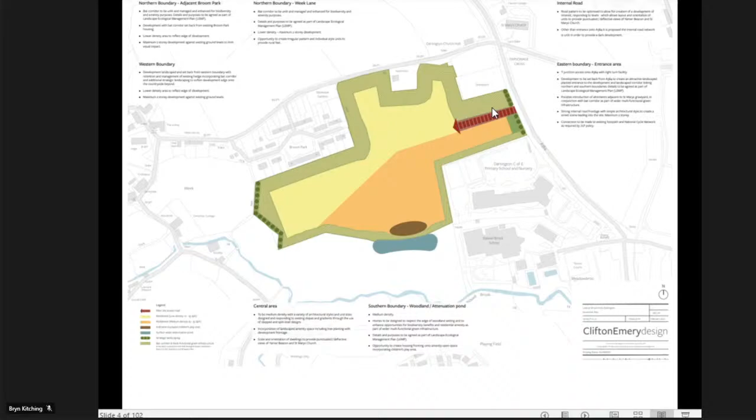Access was approved at the outline stage, so a new vehicle access into the site from the main road, at the halfway point between the cemetery here and the school here. That access point, involving a right turn lane and cycle pedestrian access, was approved as part of the outline.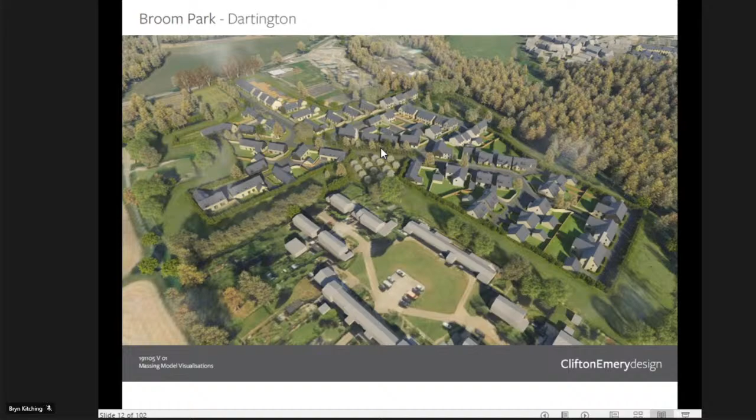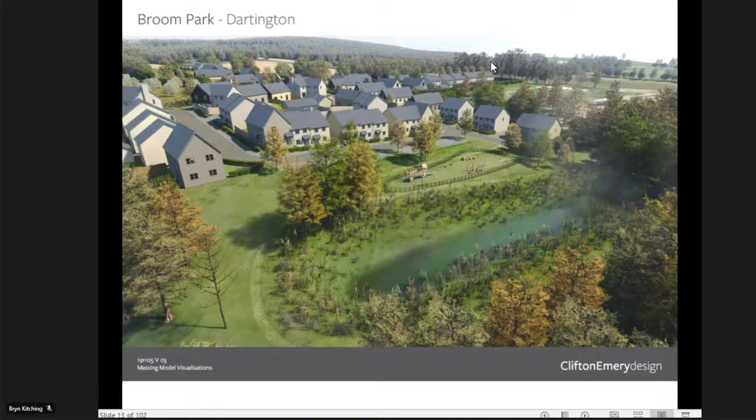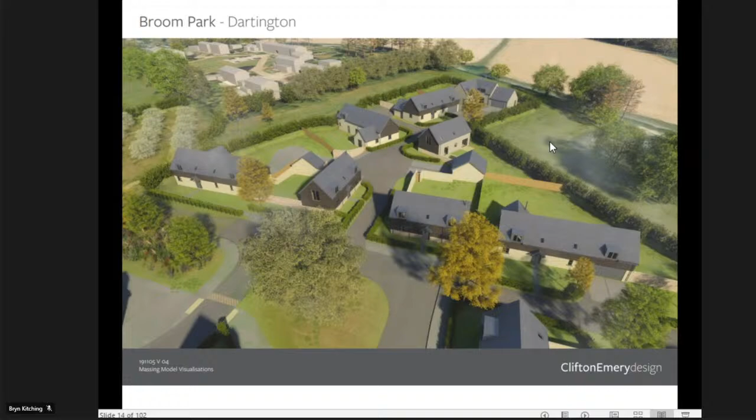So we've got a site running upwards there. This is the view of the proposed 1.5 stories around Hazel Park, in the northern part of the site. The existing development at Broom Park is here, with the orchard area and the existing bungalow on the site. For members on the site visit, we entered the gate next to the existing bungalow, and you can see the dark corridor, a 20-metre buffer all the way around the site.

So a mix of house types from one bed through to 4-bed housing on the site. Some of this is in terraces and semi-detached at the entrance and on the lower parts of the site, which tend to be the smaller 2-storey houses, as in 1, 2 and 3-bed properties. Then generally larger properties on the upper slopes, in a mix of 1-storey, 1.5-storey and 2-storey.

Position of the affordable housing: the outline secured the full policy complement of affordable housing of 24 units. These are located in 2 areas - one at the entrance overlooking the allotments, and secondly in the lower part of the site overlooking the children's play area and public open space, and the attenuation pond.

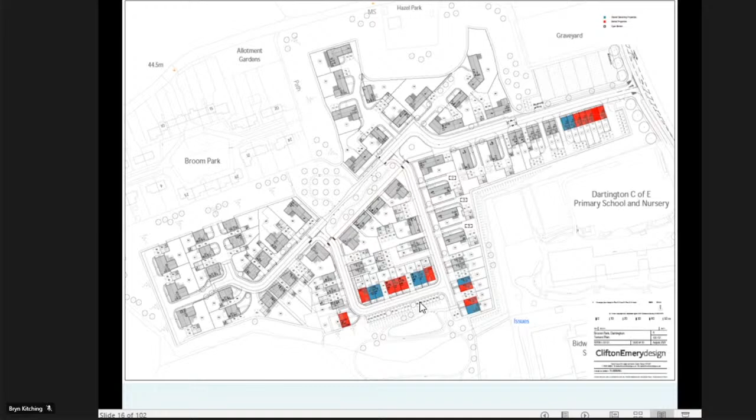On the site visit, members were asking questions about the relationship in heights of dwellings in relation to Broom Park itself, the existing dwellings there. Here's a section through the 3 dwellings on the far west of the site, plots 57 to 59, through to the existing dwelling on Broom Park. So on the section, the existing 2-storey dwelling on Broom Park, and then the heights of those properties coming down. The red line is the existing ground level. These are dug down slightly below existing ground level, but in terms of ridge heights, you can see they're lower than the properties at Broom Park.

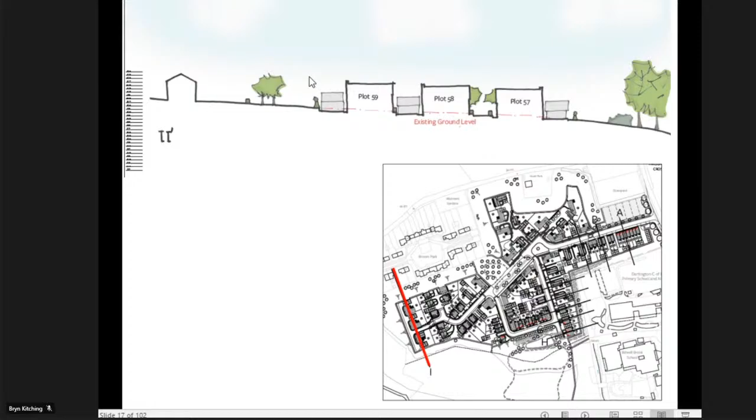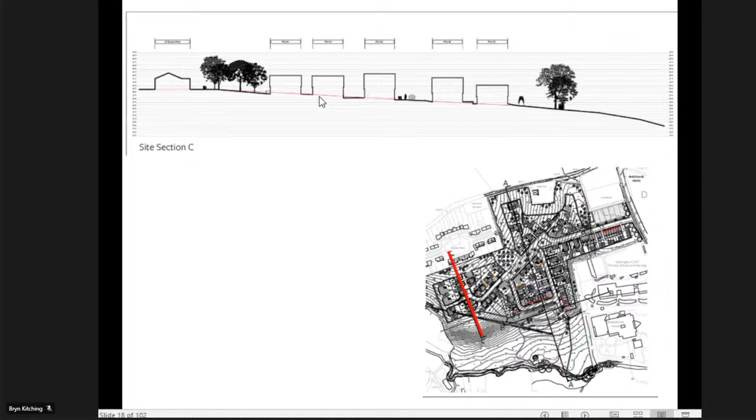Moving across a little bit through the bungalows at Broom Park - this is the bungalow on the Broom Park development itself. Running through the heights of the dwellings, which are a mix of 1.5 and 2-storey here, those ridge lines are again kept below the height of the bungalow, with the red line being the existing ground level.

A long section now running north through to south. Up here we have the area just behind the bungalow of Hazel Park, again with the red line being the existing ground level. You can see there's a combination of cut and a little bit of fill as we run through that line. This one extends to the lower drawing, through the public open space, children's play area, down to the attenuation pond at that point.

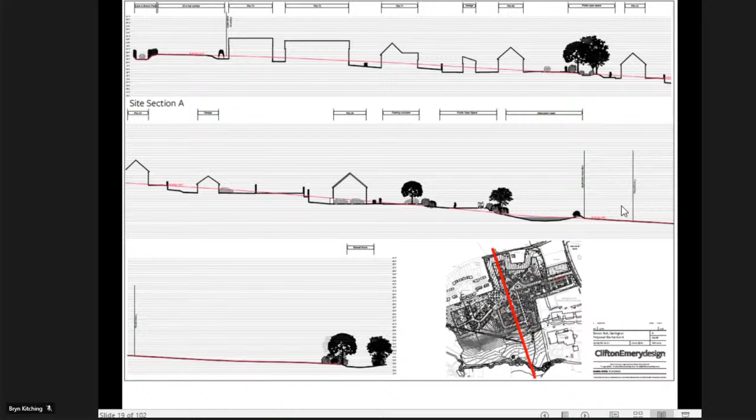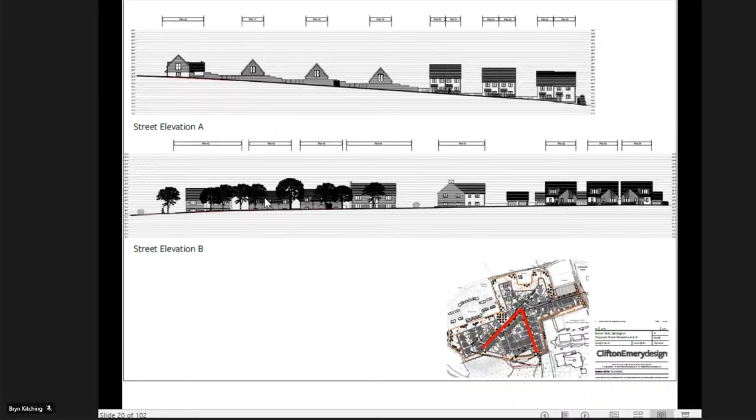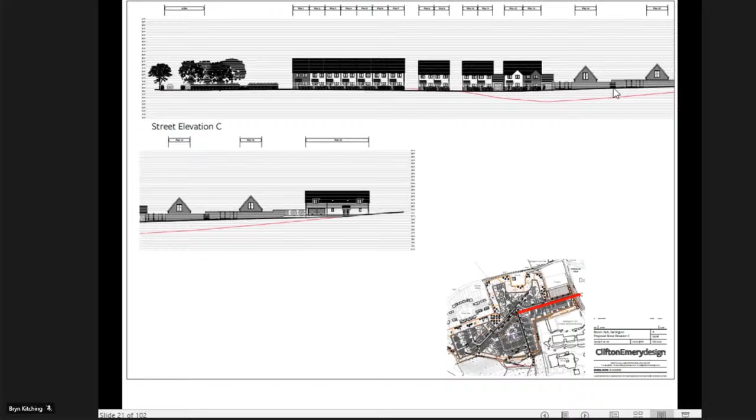On that main access route coming in, we have another section, looking south. This is the main road here, then we have that 30-metre offset before we hit the start of the terrace of dwellings going across, and then pairs of semis. Important to note here is the red line, which is existing ground level. Where there's a little bit of cut at this stage, there becomes quite a bit of fill here - that's in the dip when we were on the site, where we could see there was a clear dip that needed to be brought up. So that's how the road deals with that area, with some of the cut from elsewhere on the site becoming fill on this part.

I've got this plan up - this is the bin storage strategy, which I was asked to bring forward as a plan for committee from the site visit. I'm just going to zoom in so this showing the locations of bins and the routes they need to take to either go to a bin muster point or to take them out to roadside curbside collection. Across the site, we have locations of all the bin storage points there.

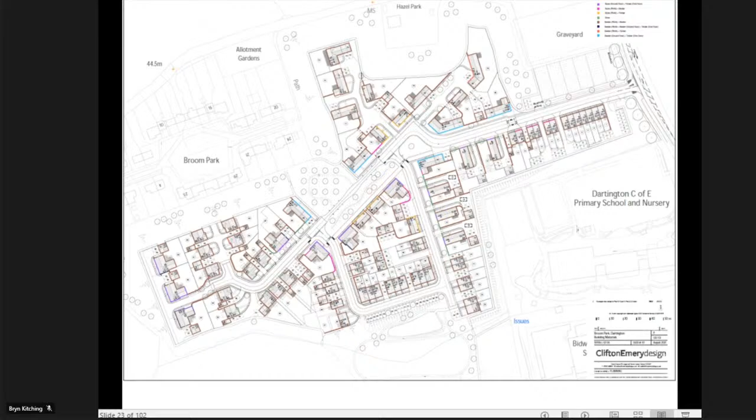I have this in case any members have any particular questions about particular properties, but I don't intend to go through each house type at this stage.

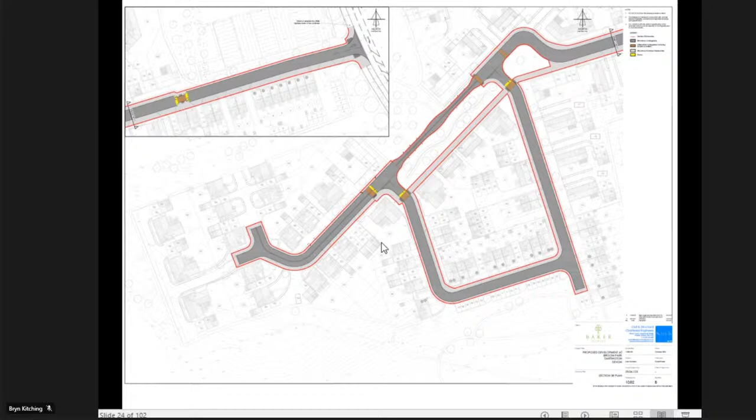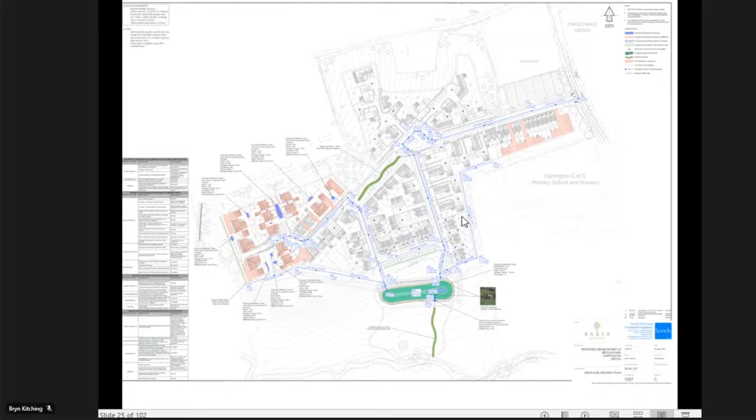Part of that drainage strategy plan here, we'll just zoom in. Purple is buildings which go to the attenuation basin, the blue is driveways to the attenuation basin as well, and the roads to the attenuation basin. The darker blue and the green is to soak away on the site.

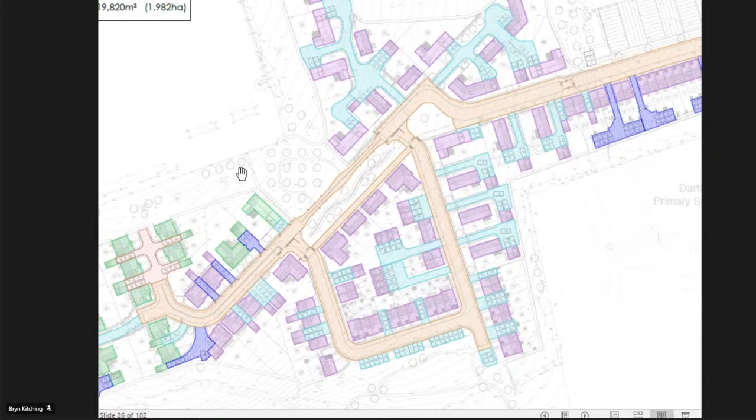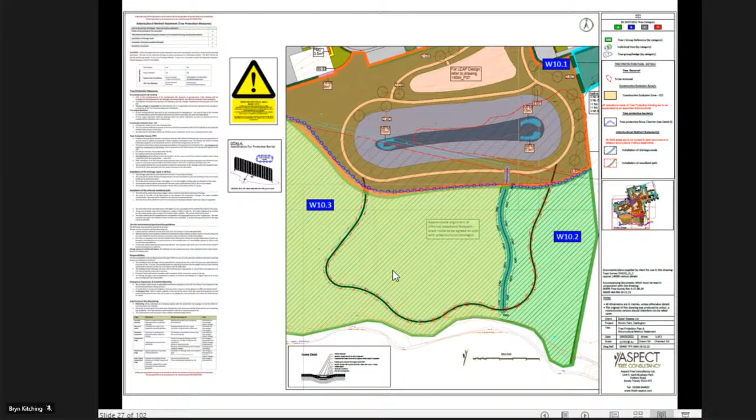As part of this, it shows the walkways in the open space around the attenuation basin and the woodland walk proposed within the areas of retained woodland, which are subject to the woodland management plan secured as part of the outline consent.

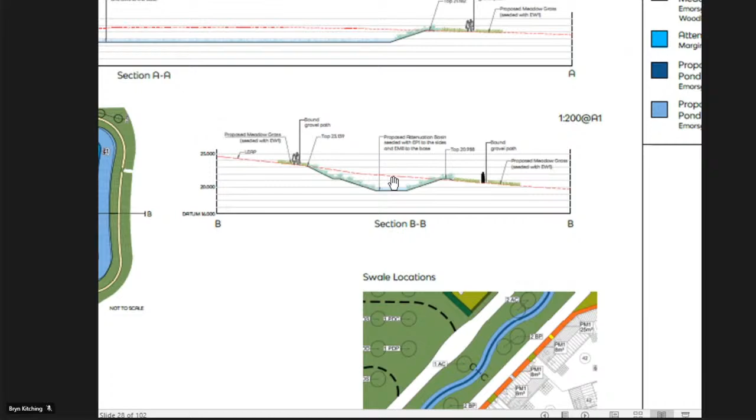For the attenuation basin, we have some cross sections to show how that would work. There's the children's play area here, then a footway around, and then dropping down to the attenuation basin with the lip coming up, and you can see how that's cut into the existing land. Then we have the cross section through the attenuation basin in the other direction, the east-west direction.

This plan shows a combination of the hard and soft landscaping proposed. This shows the location of the children's play area, the attenuation basin, the dark corridor all the way round the orchard here, and the rain garden.

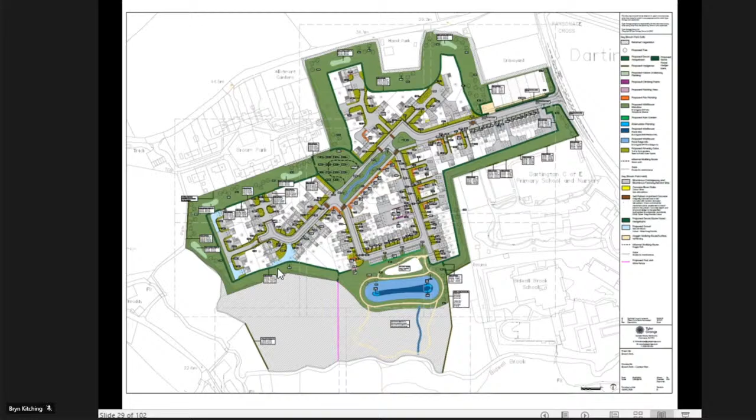Surrounding the development, as I mentioned earlier, there'd be a Devon bank with hedgerow planting on top all around this area to create the dark corridor. These are the details of that: we have 1.4 metre high banks with planting on top. In some places these have to be stepped where we have a change in levels, so there's the example of that.

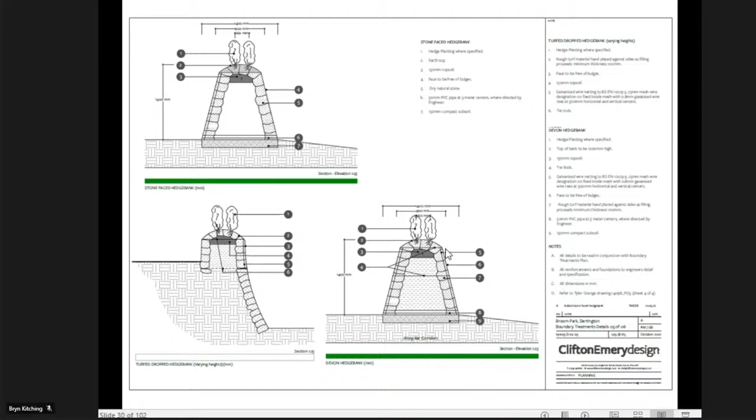And then facing onto the road, a stone-faced Devon bank, again 1.4 metres high with planting on top. This is on the road because it's a bit more formal there, and to tie in with the existing boundary treatments to the cemetery, a stone-faced Devon bank with beech planting on top.

The Open Spaces Strategy Plan shows the areas of allotments, the dark corridor, which is open space but not accessible, shown in lighter blue, so that doesn't have public accessibility because we're retaining that as dark corridor. The darker blue shows public access into the orchard and rain garden area. To the south, in pink, we have children's play and the attenuation basin, then retained woodland in green, which has public access, and retained woodland in grey with no public access.

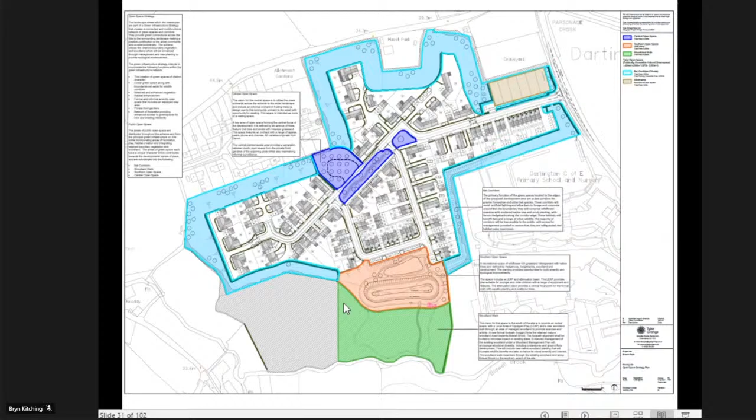We have details of the LEAP, the locally equipped area for play, on the southern part of the open space. This shows the detail of all the equipment going there, fenced around with all the necessary safety matting and required number of pieces of play equipment, along with benches and bins, etc., to meet the requirements of the open space specialist.

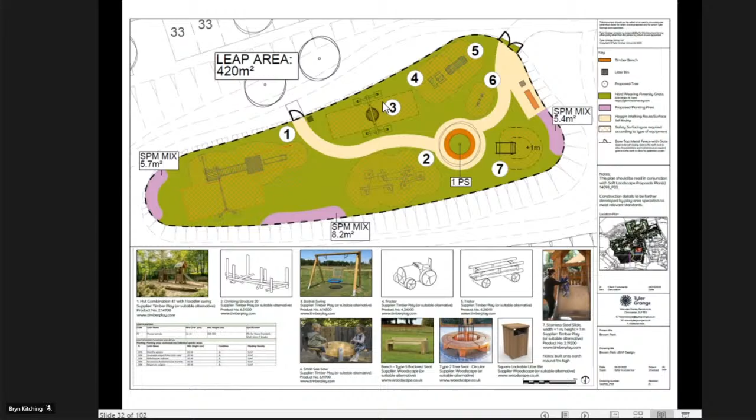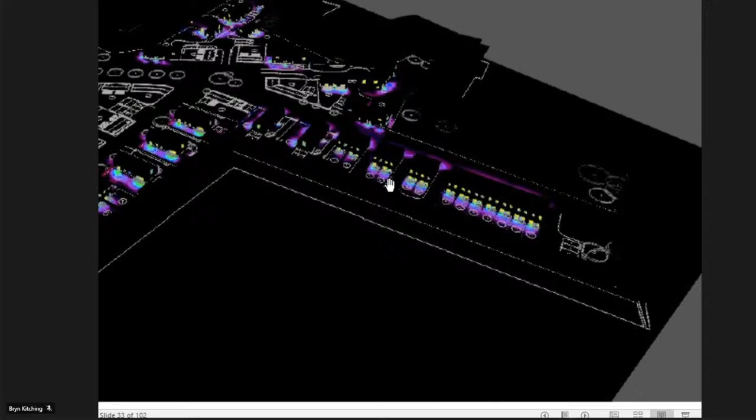I also wanted to show some plans, as I was asked on site about lighting and light spill, and I said I had plans showing how this had been modelled to ensure those dark corridors remain dark. So I'm going to zoom in here - this is the entrance to the site, the terrace of dwellings, and then the semis. This is the light modelling based on it being nighttime, all curtains open, the light fittings proposed inside the dwellings, in terms of what that light spill is onto the edge outside the dwellings. This demonstrates that none of that light spills beyond the boundaries of the dwellings or into the dark corridors.

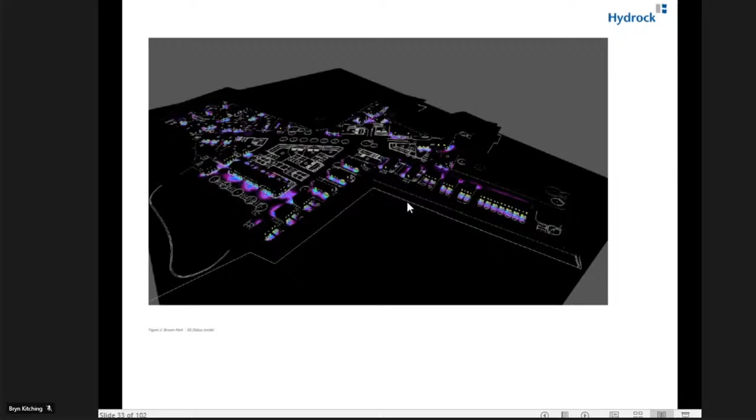It hasn't been modelled for the very centre of the site, simply because it's unnecessary, as it's not next to any of the dark corridors. So we have the modelling to show the light spill, also shown on these plans, where the areas of red are basically any area which is over 0.5 lux, the maximum amount of light allowed into the dark corridors. As you can see, none of those areas of light spill extend into any of the dark corridors - all light is contained within the site.

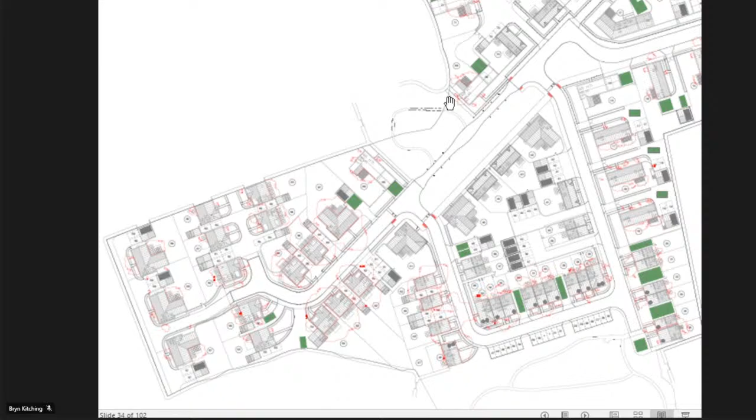Where we have properties with boundaries facing the dark corridor, there are no windows in those side elevations. This demonstrates that the light will be contained within the site and not into those areas which are required under the Habitats Regulations Assessment to remain at less than 0.5 lux.

Lighting at the entrance to the site - the access to the site was approved as part of the outline. Because it involves a right turn lane, it is necessary to have street lighting at the point of access for highway safety reasons. So we're looking at three lampposts with luminaires which are specially designed to be bat-friendly, or appropriate in terms of colour for bats in the area.

Now these do have an area of light spill which will spill a little bit beyond the road, and these are shown here. But this is being put forward to Natural England in terms of their requirements for keeping these corridors dark, and it was accepted as part of the outline that this area would need to be lit for street lighting, but there is no street lighting within the development proposed at all. So that shows the area of light spill from those luminaires.

What this plan doesn't take into account is the proposed tree planting along the front and proposed hedge banks - this is just treating it as if it were a flat site with no trees. But in this one, there are trees proposed on the inside of that Devon bank and along the frontage of the allotments.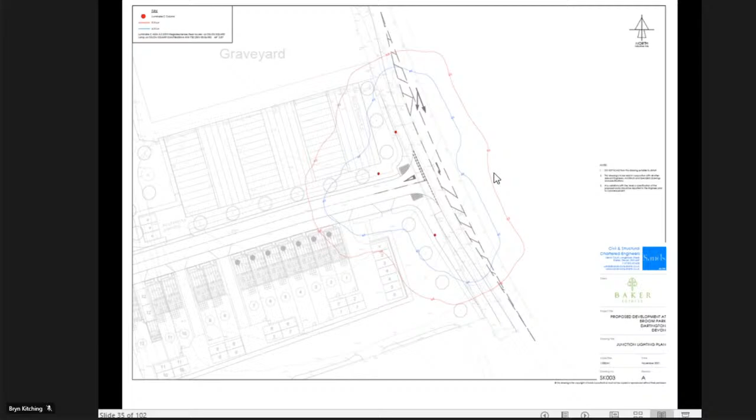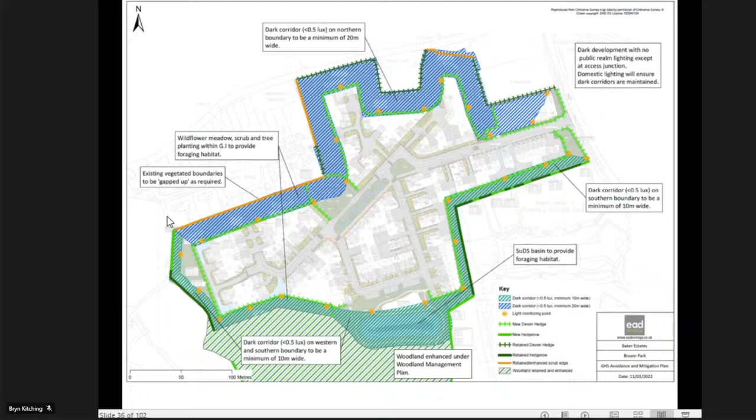Additional hedge planting is proposed in areas on the other boundary where there are gaps at the moment, to stop spill, for instance from the school, or spill here from any potential users of the pathway along this point.

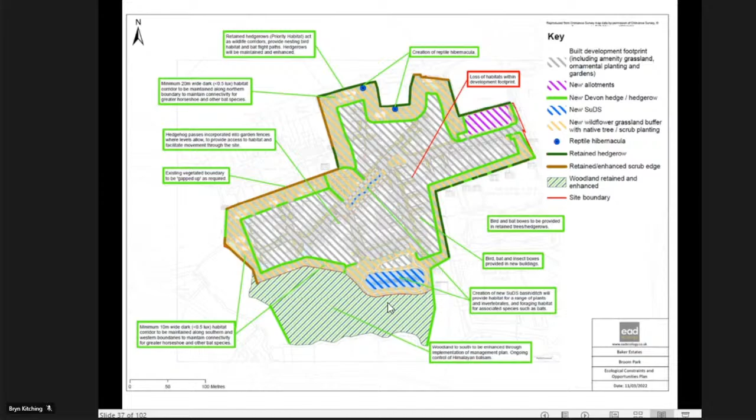Also, as part of the submitted Landscape and Ecology Management Plan, we have details of the reptile log piles and homes, and hibernacula here and here, details of hedgehog passes through boundary fences, and how these areas are kept dark.

Part of the outline, there was a condition requiring a solar orientation plan to be submitted, showing all properties optimised for solar potential, for solar panels and for solar gain in terms of windows. This helps explain some of the choices in the layout, trying to get as many south-facing properties as possible. Anything with a green line is within 30 degrees of south, and anything with an orange line is within 45 degrees of due south.

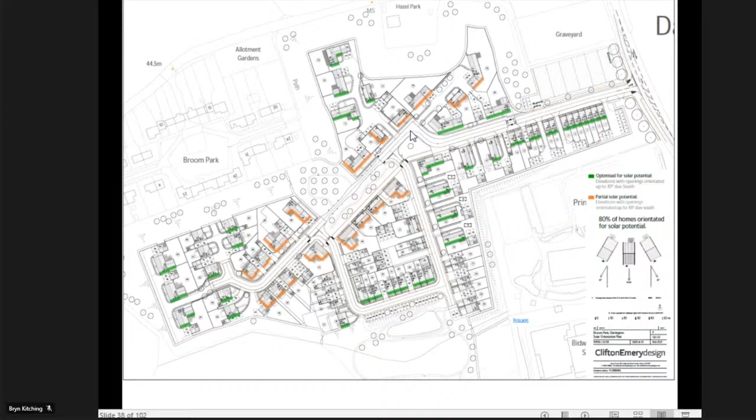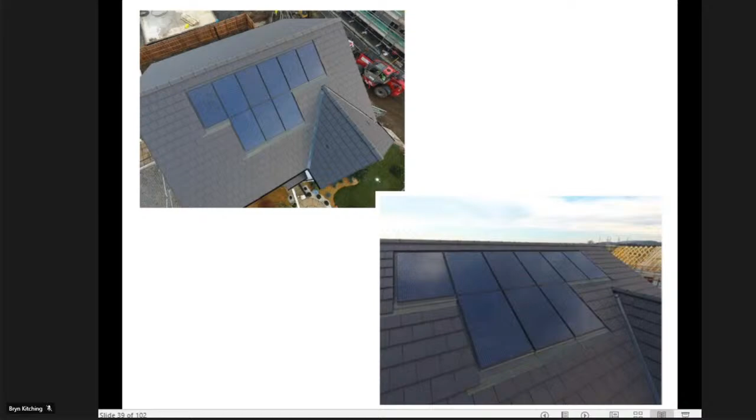So this indicates where those elevations optimised for solar gain are located. As mentioned, solar panels were proposed, and this is an example of panels used on another development by the same developer at Dartmouth, where they're recessed into slate roofs. I'm proposing a condition requiring details of the same, to make sure solar panels are recessed flush with the roof rather than sat on top.

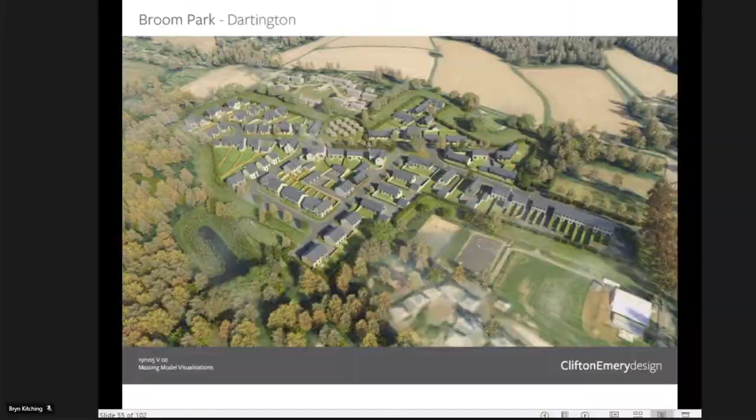Notwithstanding Ms Houselander's offer to show some elevations, which might be appropriate now to give more substance to it, I would like to propose deferral, because I think there are a lot of unanswered questions which I will happily go through, but maybe it'd be better to take Ms Houselander's offer of elevations first, just to further inform what's going on.

Okay, well let's have a look at a few of those elevations. Then what we will do is - I've got a proposal for deferral, which I think is the appropriate time if we're going to do it would be now. That would obviously have to be seconded and then we'd vote on that. But let's have a look at a few of the elevations now so members can see, as Ms Houselander says, this is a reserved matter, so the appearance and design is all important.

Mr. Kitching, if you could just talk us through these, that'd be great. Thank you. All right, there's 57 different slides here. I shall take some select few - I'll go through them all, but I won't speak about each one.

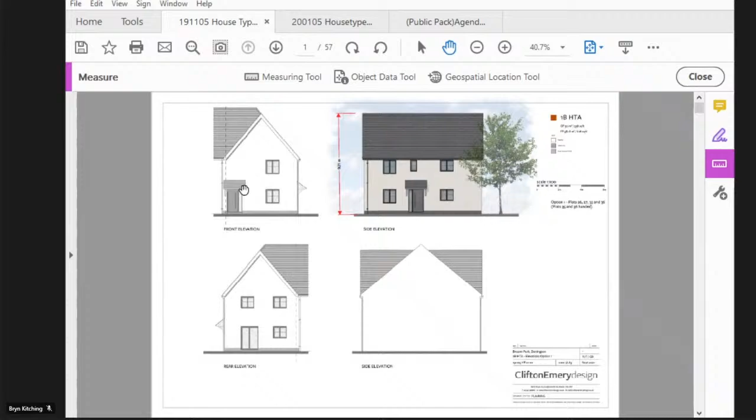So this is an example of a one-bed maisonette - a property with a ground floor entrance, end of terrace, with a second door. One door goes up to the first floor unit, and the second door to the ground floor maisonette, and that's the internal layout. I should mention all house types meet the minimum space standards, and the garden sizes also meet the required spaces.

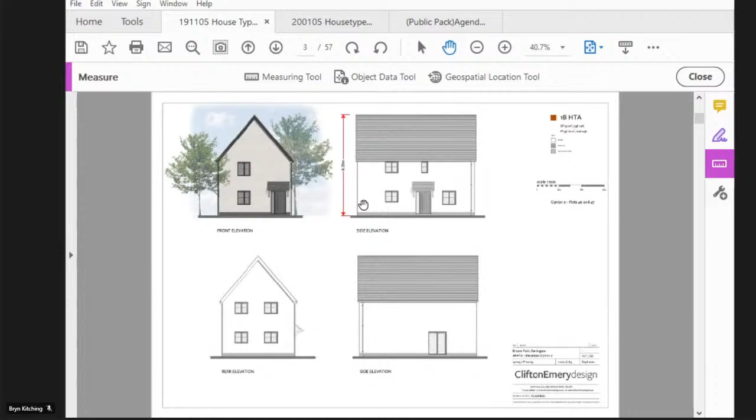We have a slightly different design of the same thing in terms of a maisonette - this is the freestanding two one-bed maisonettes here. An example of the terrace dwellings, so a 2-bed terrace, with render, or if it was an end terrace, render or stone. A 3-bed, I believe also within the terrace, and the 4-bed is also potentially a terrace dwelling as well.

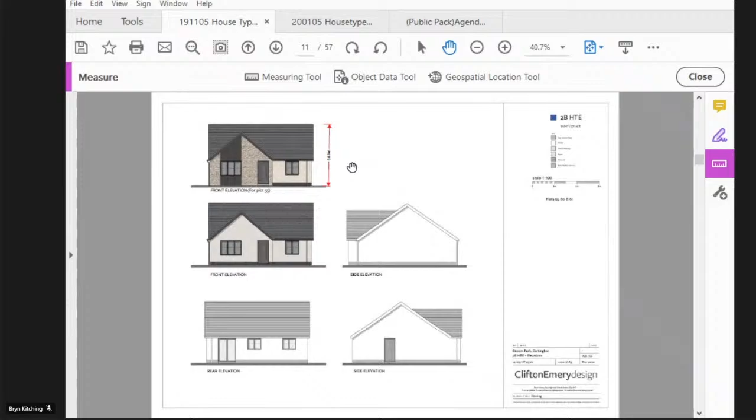And then some of the bungalows, so the single-storey dwellings on the site. Some of the 1.5-storey dwellings on the site - these are the ones which can include some of the dark stained timber cladding.

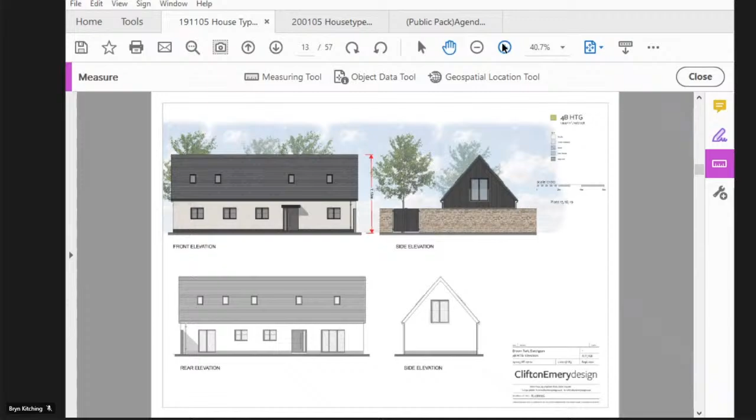Mr. Kitching, could I just stop you there? I'm just looking at the fenestration - am I right in saying that there are crossbars on the windows there? They're not just full big panes, but they've actually got smaller panes within them, is that right? Okay. Yeah, so those are showing a crossbar that you will see.

I think in terms of the conditions.

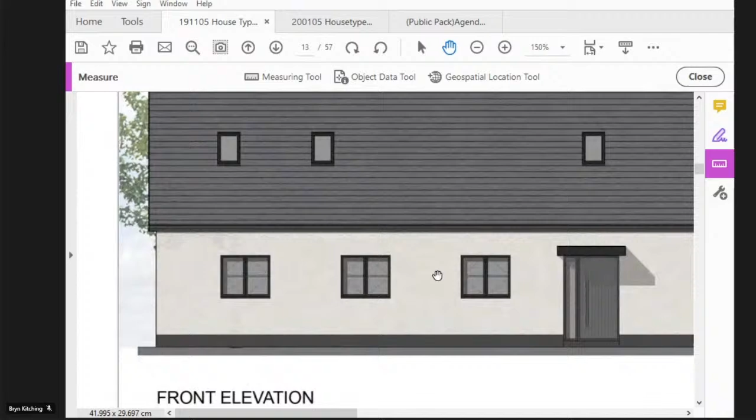There's some level of detail in terms of exactly how those precisely are going to look. This is part of condition 2F, for Foxtrot. The cross-section design, appearance, thresholds, profiled reveals, surrounds, materials, finish of all doors and windows, including method of opening and proposed finish, lintels and sills - that precise level of detail is to be secured by condition.

Sorry, I've managed to - no, thank you Councillor Foster. Did you? Yeah, I was just asking what the roofs are basically going to be, and also the render. Have you got a variation on the render on these houses?

Bear with me a second. Sorry, bear with me a second - that program's just crashed. I just reopened it.

While Mr. Kitching is doing that, you've seen a rough example of some of the details of that.

Councillor Hodgson's proposed a deferral. Do you just want to expand on that and why you feel a deferral's needed, if you could? Thank you. Yeah.

Members who attended the site meeting on Monday will be aware, and perhaps also recall from the previous outline application for this site, that there is deep concern from the public and the parish council regarding the proposed development, and indeed the site at Sawmills Fields, which we also viewed.

Dartington is a rural parish, but this application for 80 houses, and the next application on today's agenda for another 40 houses at Sawmills Field, a few minutes' walk away, are for more dense housing that is likely to tip the balance away from a previously delightful rural parish, long considered a gem in the South Hams, to become just another boring urbanised area, detracting completely from the extraordinary heritage and historic area of Dartington.

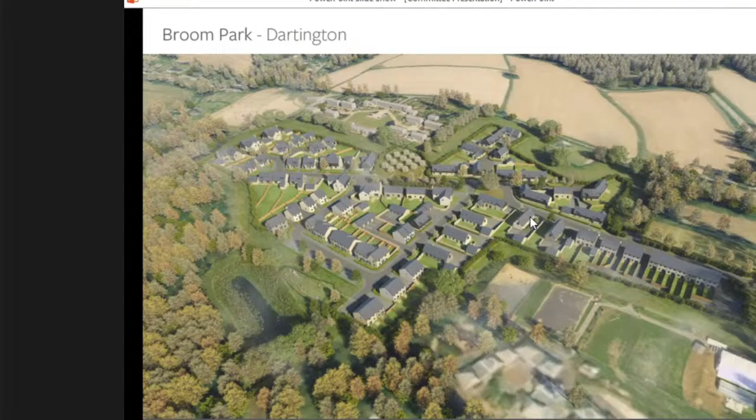There's more than one listed building in proximity to this site. There's the whole hamlet of Week, which is full of listed buildings. There's the listed building which is part of the school, right on Shinners Bridge. 30 metres setting back from the road is about the length of this room - you're not going to hide big blind gable ends. There's not even been produced a map which shows where all the listed buildings are. I actually sent some photographs across this morning that Janice has, and one of those does have the listed buildings all dotted out. Do you want to put that up?

That's all right, please.

I think a lot of the points that you raised, Councillor Hodgson, are rather for... I mean, obviously you feel you would object on those grounds, but I don't think they would necessarily be grounds for deferral. But if we could just see that map - I think the problem, Councillor... Chairman, if I may - is that we're not actually looking at the whole picture.

Why was that Heritage Officer's report removed from the outline planning portal so that people could actually read it? Why was there no proper... Well, actual... Let Mr. Kitching answer that.

Yes, I was asked the same question by Hilary White yesterday by email, which I responded to as well, to say that actually all consultation responses are removed from all applications on the web after 6 months. So because 6 months has passed since the granting of outline permission, automatically the consultation responses attached to that outline permission are all removed from the website. And that's the same for this application and every other application dealt with by the council. I responded to Hilary White with an explanation of that yesterday afternoon.

With respect, I'm not just here to speak for Dr. Wyatt, but I'm just pointing out, why is it we don't actually have a comment from the Heritage Officer in writing that we could have seen? I think Mr. Kitching has explained that - you might not necessarily agree, but he's pointed out that basically the Heritage Officer had a few concerns but felt they could be easily mitigated, and on seeing this felt that they had. It probably would have been better if he had put something in writing. Members can come to their own conclusions, but I think the fact that he hasn't commented on it says something, in a sense. It's not that it's been a great benefit.